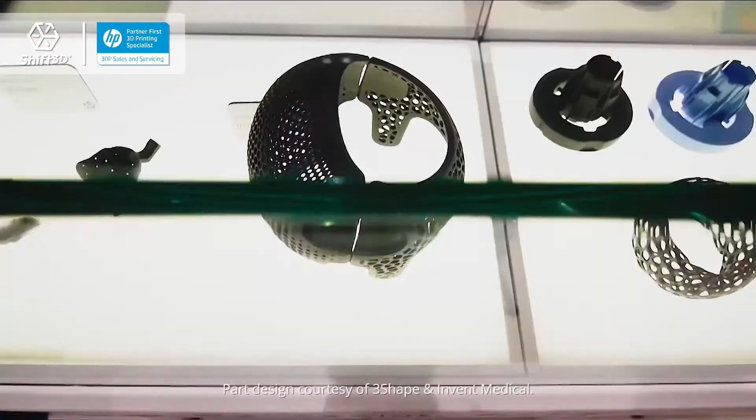If we're going to change how the world designs and manufactures, if we're going to transform a $12 trillion manufacturing industry, we can't do it on our own. Revolutionizing an industry like manufacturing is really a tall order for any one company, because what it really takes to solve a problem is an end-to-end solution.

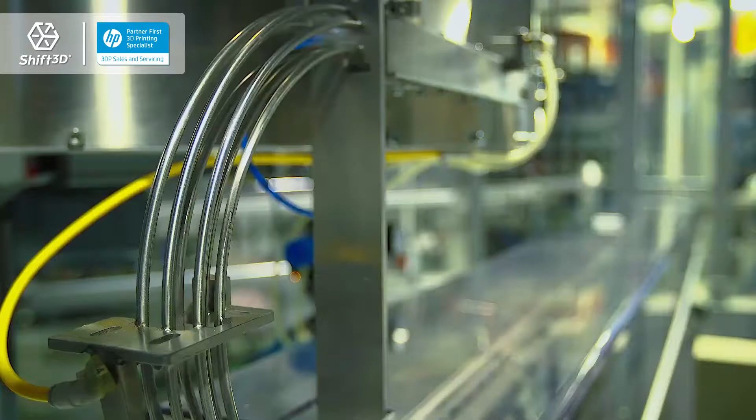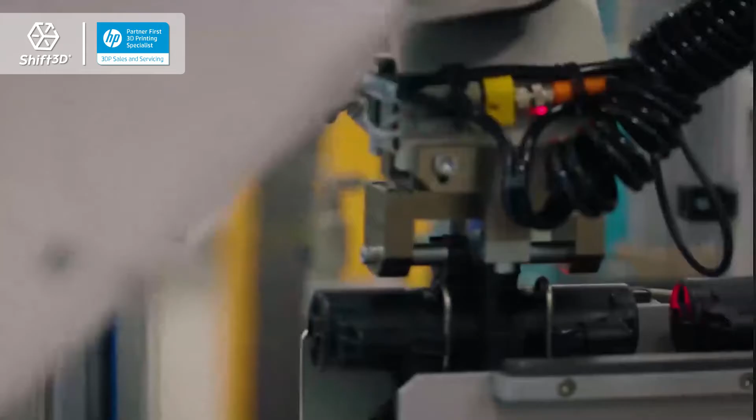What we really appreciate about HP's approach is it's inclusive and broad, and it leverages a full ecosystem. So what we chose was to partner with the best in software, the best in materials. We wanted a company with very strong experience in manufacturing that could understand what it really took to go into final part, and Jabil has a proven record. Jabil, as a large manufacturing company, has been leveraging that sophisticated knowledge on materials to really allow us to do things in manufacturing that many people can't do.

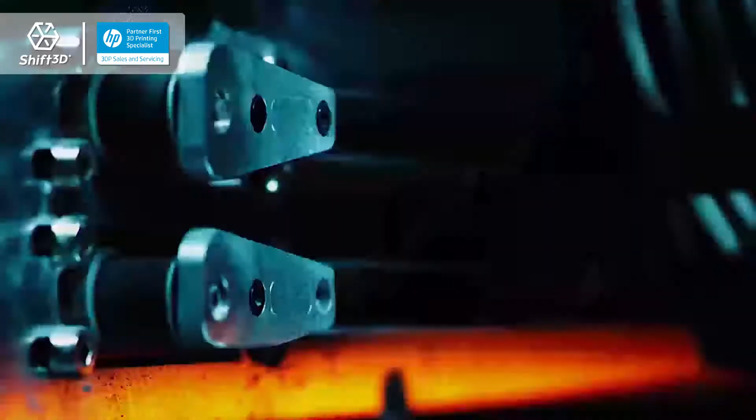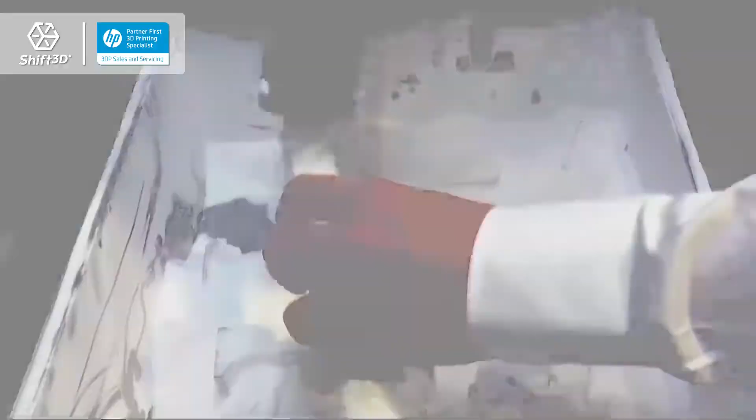That's why HP chose Jabil to help them print the printer, leveraging Multi-Jet Fusion technology and Jabil's manufacturing expertise and processes to bring the printer to market faster, reduce costs, and realize an unparalleled design freedom and flexibility. About 50% of the custom plastic parts on our first printer actually made sense to be 3D printed.

We started moving parts to production, and Jabil became the natural partner to do that, not just because they were our foundational partner, but because that's Jabil's expertise. Jabil, in terms of its foresight and thinking, was way ahead. They have experience in very different industries, so they can bring inputs from very different types of customers, and they have all their data at their fingertips.

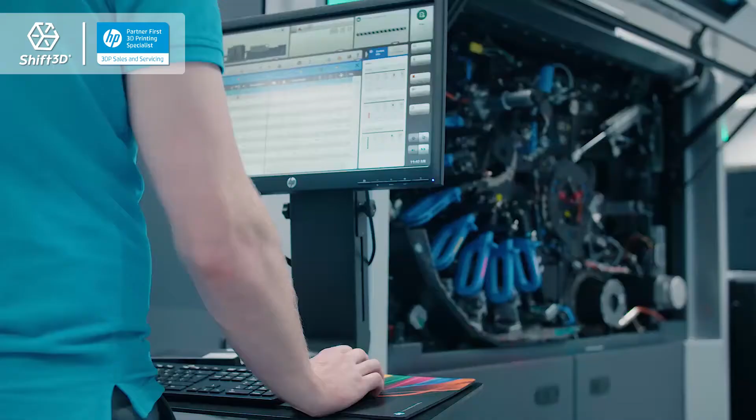Jabil is able to bring that point of view and help educate us. And then they were able to look at what we're doing with our solution and help give us feedback. We're up to 50 parts today with Jabil, and that's just starting.

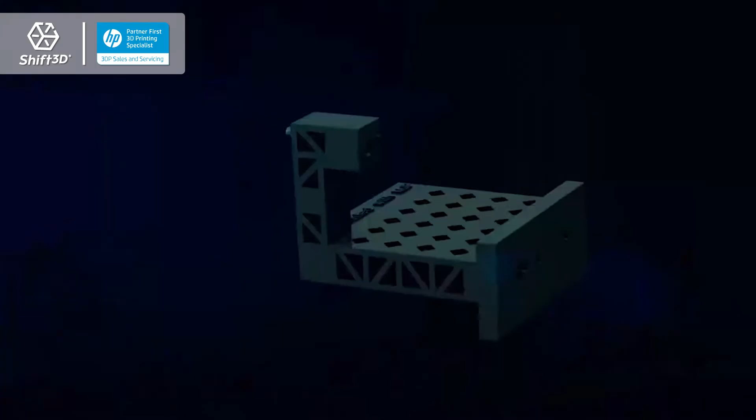We have what we call an HP on HP initiative, where we're looking at where it makes sense and when it makes sense to 3D print versus actually producing it with some sort of traditional technique.

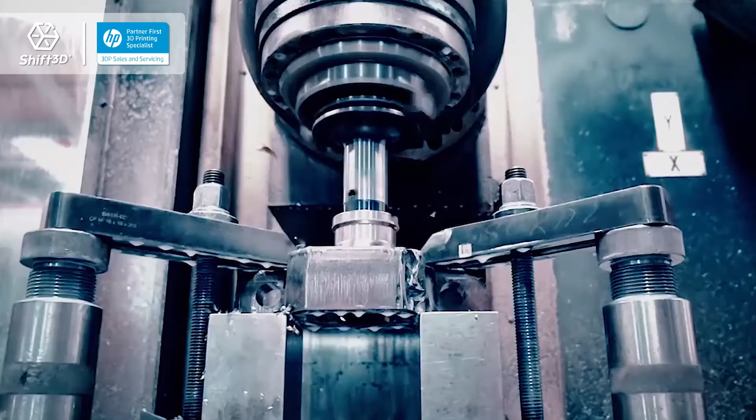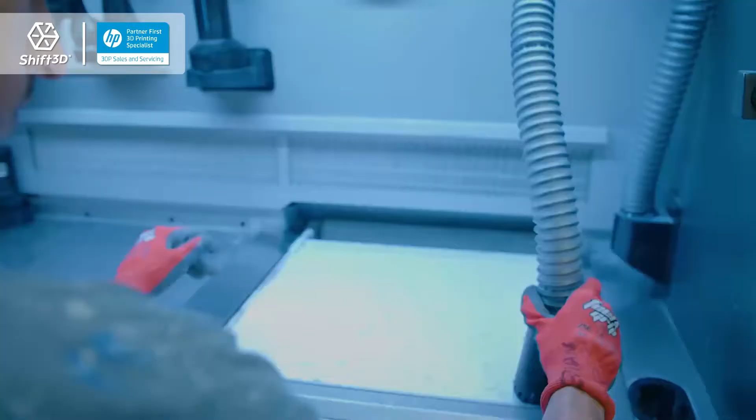In a traditional manufacturing process, we would have to move fixtures and tooling and set up a different process. With additive manufacturing, all you're doing is putting materials into the printer. So if you look at the supply chain of the future, we can simply move production from one location to the next by shifting a file.

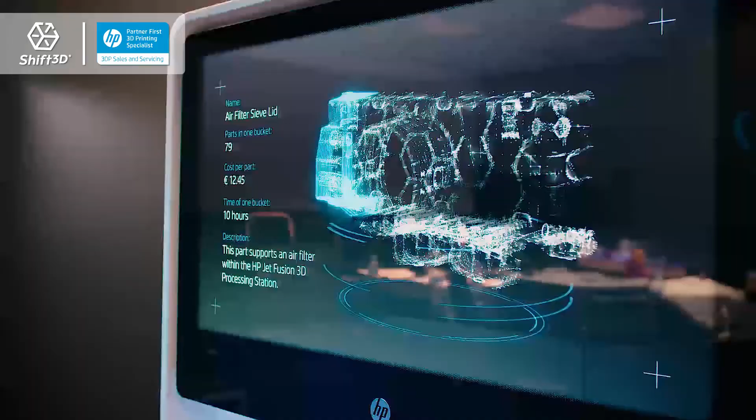Several of the businesses in HP produce parts in the hundreds of thousands and millions. So as they understand the capabilities that 3D printing brings, and as the cost of the parts goes down, we expect this to really expand. We saw break-even points move from maybe 5,000 units to 20, 30, 40,000 units.

There's a cost of creating the physical part, but then you have to assemble it. And when you start eliminating assembly costs, that's where you really can pick up big savings. Where you get some 5x type multipliers in cost savings is when you start integrating functionality.

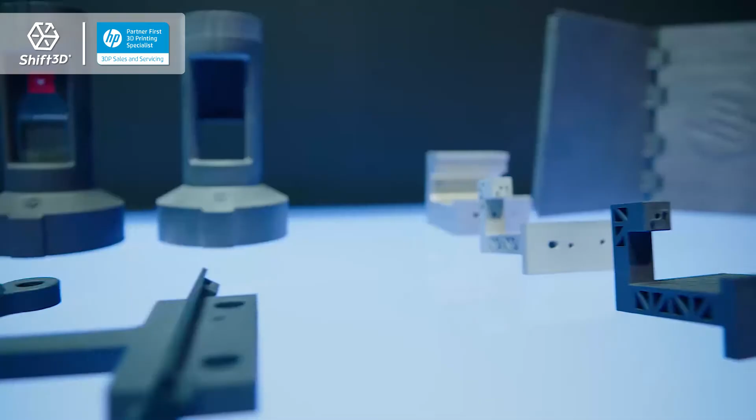On our first product, there's a part that went from like 6 parts and 13 screws to just one printed piece. We can go through 19 iterations in the amount of time it took to do a single iteration using the traditional manufacturing method. That gets us to market faster and saves a considerable amount of money in bringing a product to market.

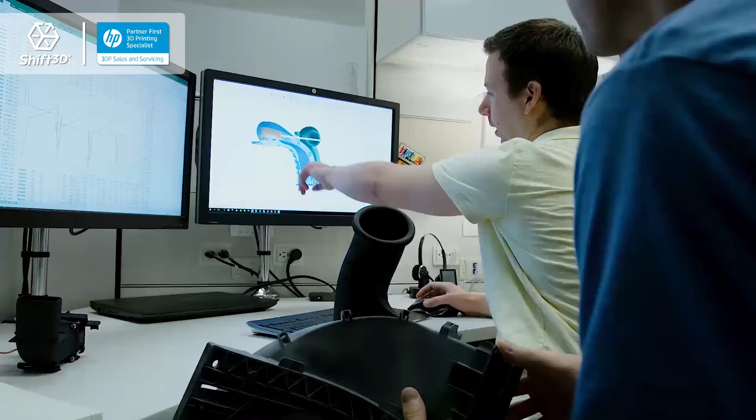Typically with a disruption, people look at working the same way, just a little better, but somebody's going to get in there and help others figure out how to think differently. And that's exactly how John and the team talked about it: how do we get in there and design differently?

We were recently awarded the contract to go build the next generation HP 3D printer. It's really exciting now to know that we'll be building the product we'll be using in the future to make parts for HP. They're really good at what they do. It's a great team.